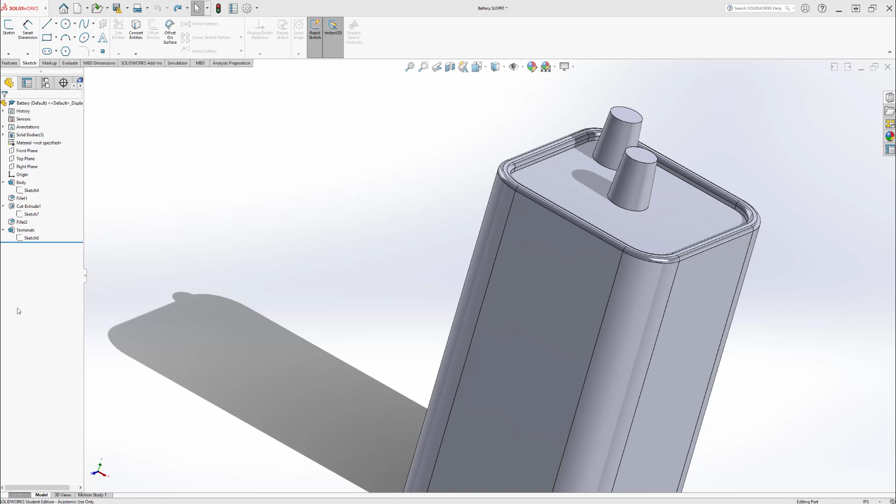Good afternoon. Today we're looking at our next project, which starts a multi-part assembly project on a flashlight. Now this is a 6-volt lantern battery style flashlight, and you're going to be designing many of the parts that go into this flashlight. The first parts start in chapter 5.

What you have to remember is from this point forward, they're going to give you a synopsis of how the part gets created and then go into a detailed how-to create the part. So you can kind of brush over that synopsis in the beginning of each chapter area.

Then you'll get into the meat of how to step by step create the individual parts for the battery. Now, the one thing that I wouldn't skip is pages 5-6 through 5-11, because they have you set up some templates, and these templates will help you in your drawing environment later. You'll save these templates and reuse them. There was some questions earlier about how do I get it to set up this way and that—that's what those early pages in chapter 5 will help you do.

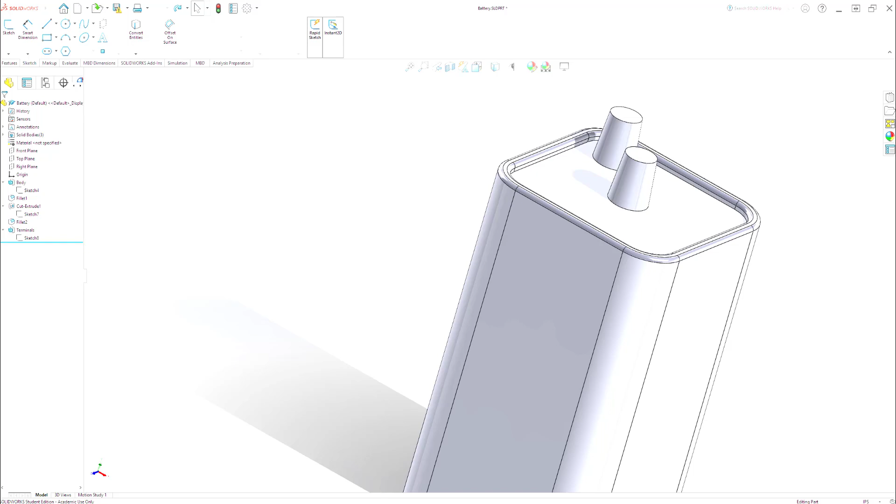From that point forward, page 5-11 through page 5-37 has you create the battery, which you're looking at right now on your screen is the battery creation. A couple things I wanted to talk about on each of these components: we'll talk about the battery and the battery plate, the lens reflector, and then the bulb itself. I've got all 4 of them that we're going to talk about.

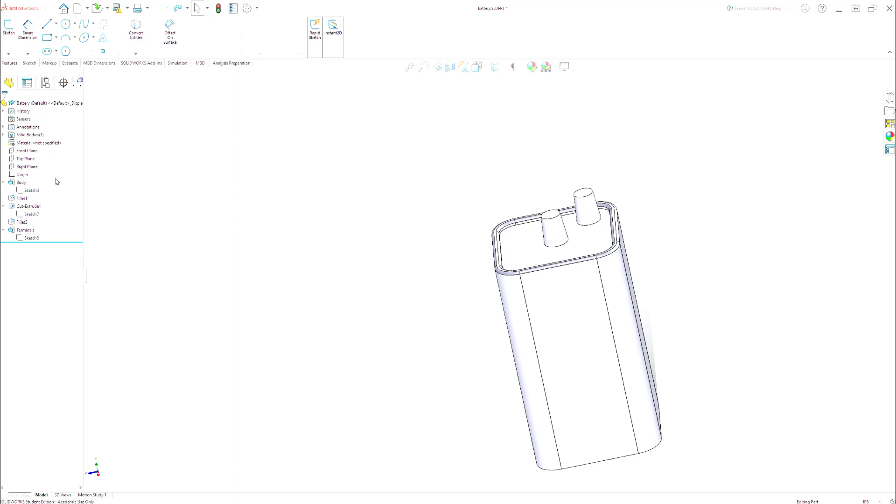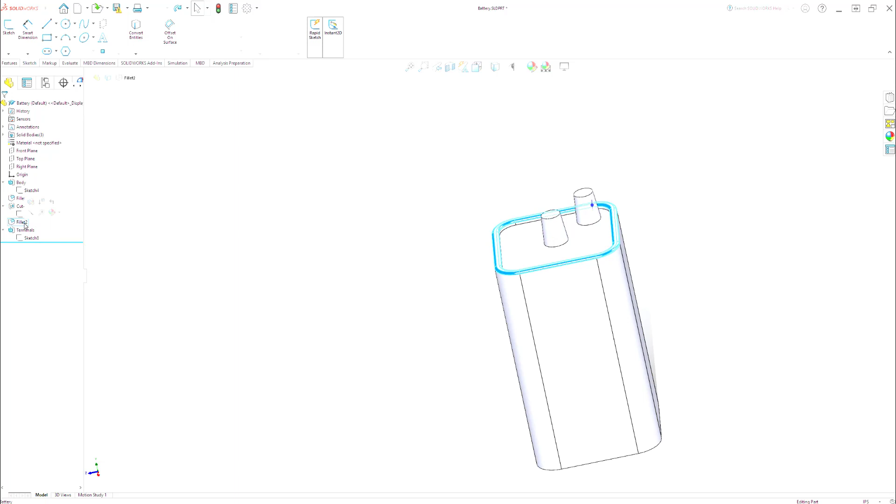Notice that on the creation process here, I created the body, and then there was a fillet associated with that—I filleted the outside edges. I then had to cut into the top of the battery to create the recess, and then fillet the inner edge of the battery, and that becomes a round over. So not only are you filleting the outside, but you're also filleting the inside, and that's what creates that rounded over look on that battery edge.

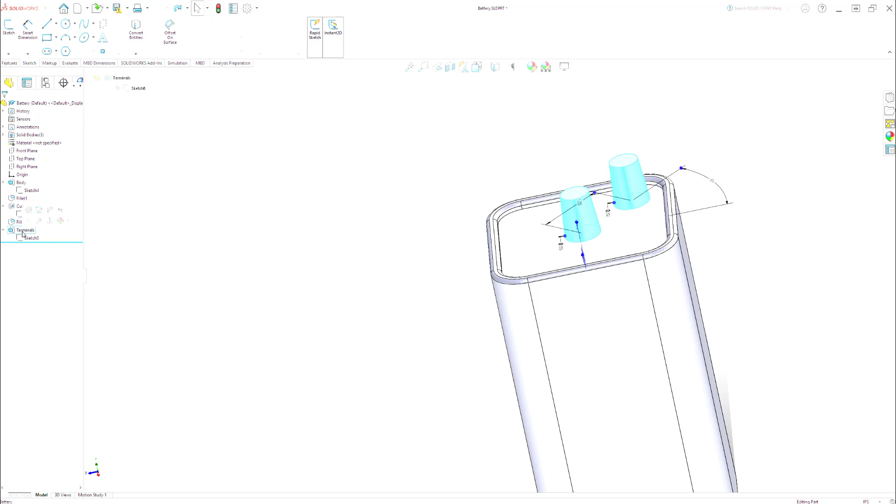And then finally, the last thing that you'll create are the terminals. What's interesting about the terminals is not only the positioning, but you'll also use a taper associated with that extrusion. So you'll draw them out, but they'll be tapering to a smaller diameter.

Just as an FYI, there's a lot of little settings that you're going to be using within the features extrusion tools, and you'll be clicking on different aspects of the feature design tree and the configuration tools. So just be aware that you're going to be clicking in areas that you haven't necessarily worked on before, but that's a good thing.

The other thing that you need to remember is it's okay if you mess up the first time. You always have that magic undo button at the top. You can always undo it if it's not right—just undo it 1 step, 2 steps, and then restart that particular process.

Sometimes it's not 100% clear in the textbook of what they're picking or where the arrow is pointing. Be very specific and look at where that arrow is specifically pointing or locating, because that could be a critical component of why it's not working, because you're picking the wrong surface or the wrong edge.

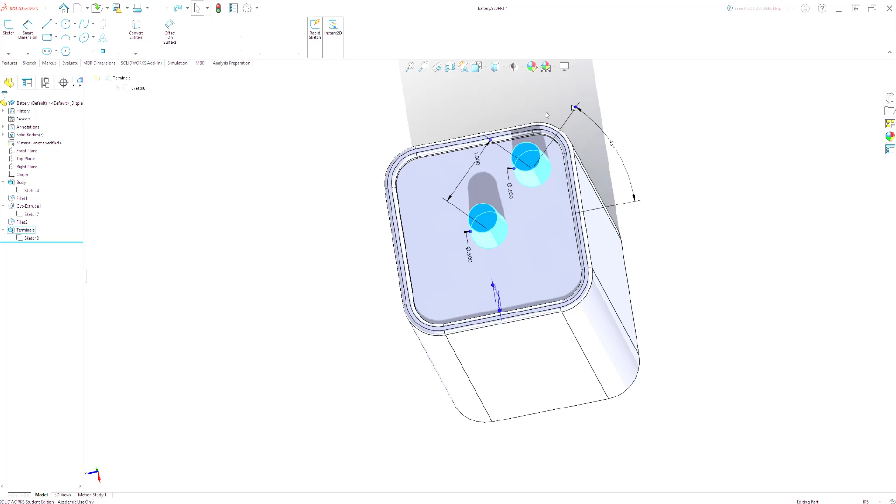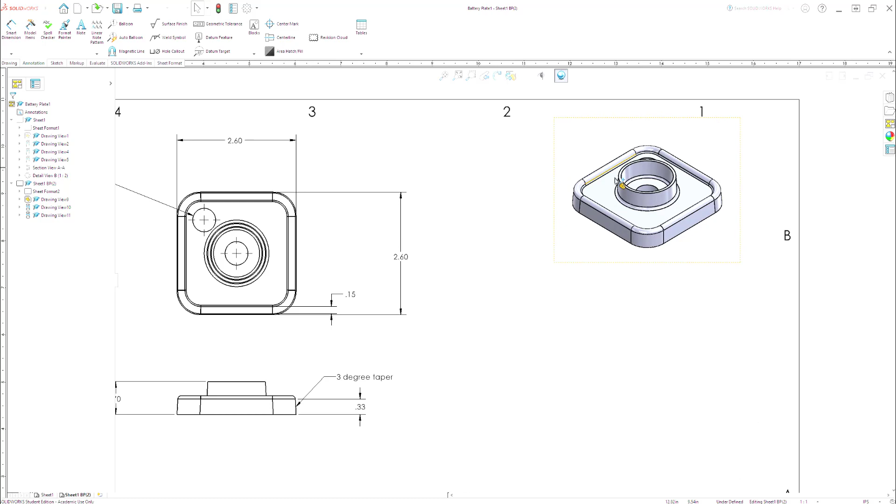And that's exactly what happens on the battery plate. So I'll bring up the drawing of the battery plate, because here's the thing: the battery plate's got tapers all over the place. Not only on the outer edges are they tapered, but the center area is tapered, and it's a thin wall. It's got that round over radius again.

And I've created a video, and I've linked the video into the email today on this round over process, because this was not easy. Let me bring up the actual battery itself so you know that it wasn't easy to create. So the battery plate, there we go.

So when you look at the battery plate, let's take a look. I started on sketch number 4. That means I had 3 failed sketches prior to that. And again, you can see that it doesn't always go perfect. When you're creating things, you undo it, you delete it, you restart it. That's part of this learning process. So don't feel bad if it doesn't go right the first time all the way through—it didn't go right all the way through on my first time on this battery plate either. This is a challenging product today that you're going to be creating.

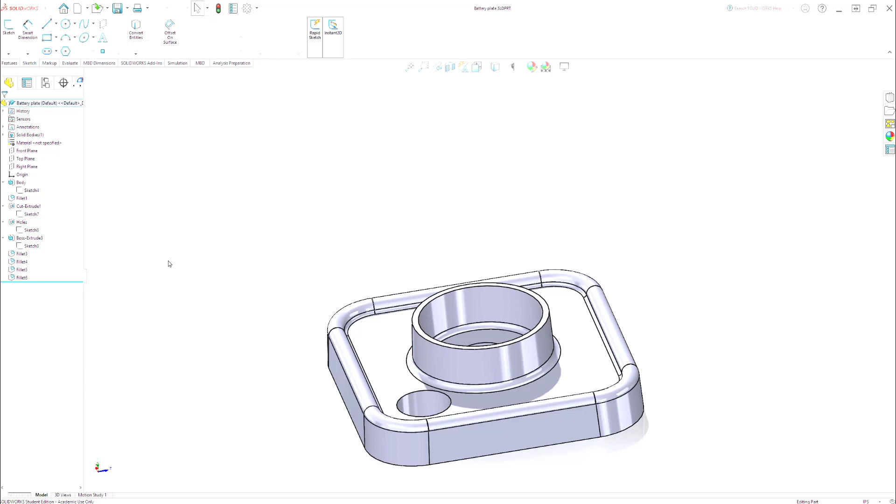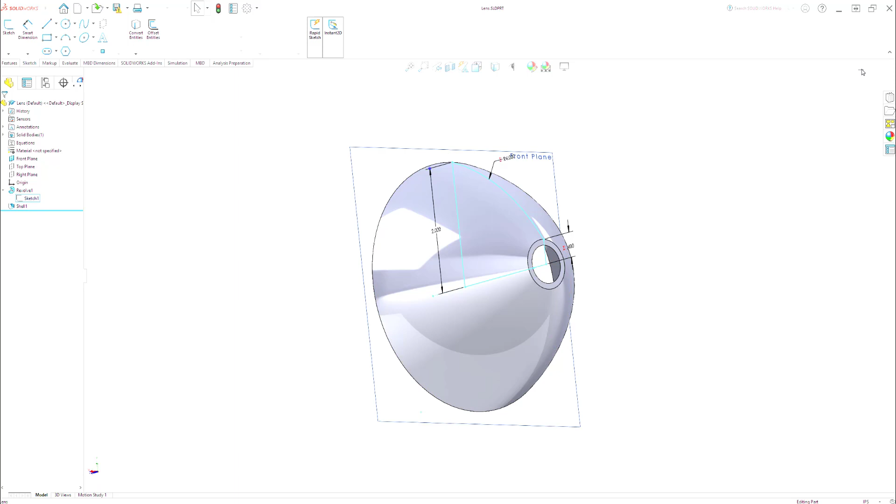Lastly, you've got 2 other components that you're going to be creating. The lens reflector—this is a revolve environment, so you'll actually create a sketch associated with that and then revolve it. Then you'll be shelling it out to make it a thin wall, so you'll learn the new tool of a shell.

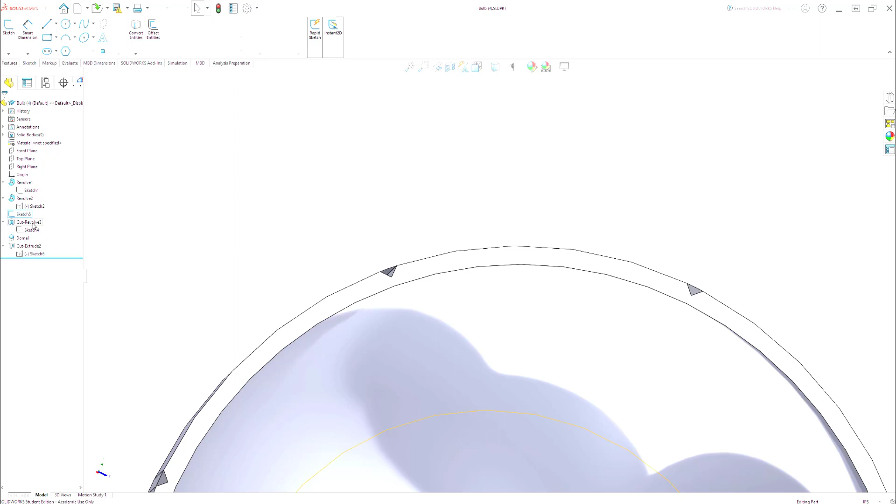And then lastly, you'll be creating the bulb, and the bulb has got some tricky components, because you've got these particular features, these cuts, that are at specific areas. What you're going to notice is that it's a revolve cut—oh, that was back here, it's an extrude cut. So you'll be revolving and cutting this particular component.

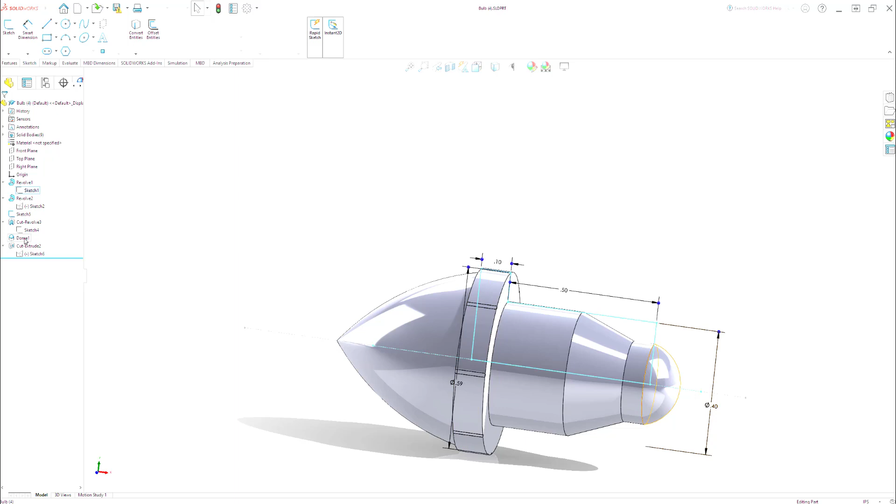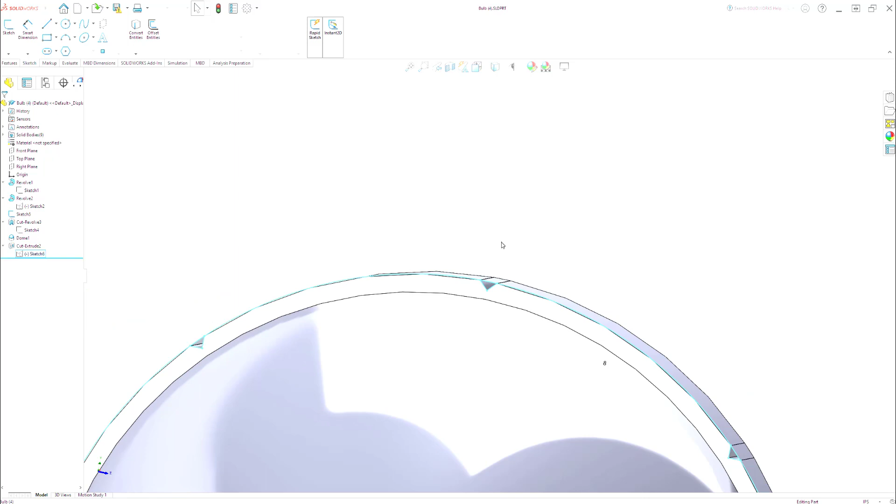You're going to be doing a lot of revolves on this. This is all a revolve environment, and there's different sketches that you're going to be working with. So you'll be revolving the body, then putting a dome on the back—that's where the switch connects to. Then you'll be creating a sketch for this cut extrude for the lock-in for the bulb itself, editing and creating and revolving these different component pieces.

So that's this week's projects in a nutshell. You'll be creating other components going forward. I don't have any of those up, but you'll be creating the outside shell of the flashlight, the outer housings. So there's quite a few components that you'll be building from this point forward, and each week it's a tutorial based system.

Again, you'll be following along in the book, and remember, the first 5, 6, 7 pages are kind of a quick overview, and it's like you want to get started, and you get started with these pages, but then you figure out that you're not starting in the actual project itself. So look over those initial pages in each of those chapters and then jump in.